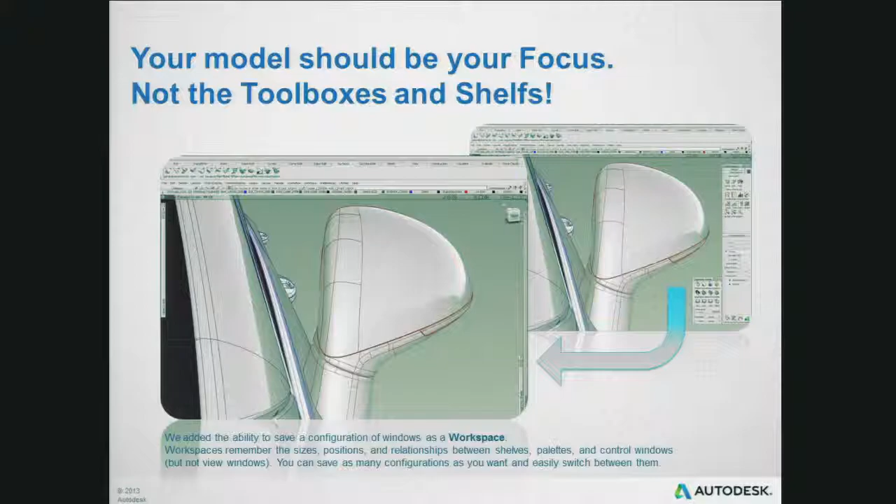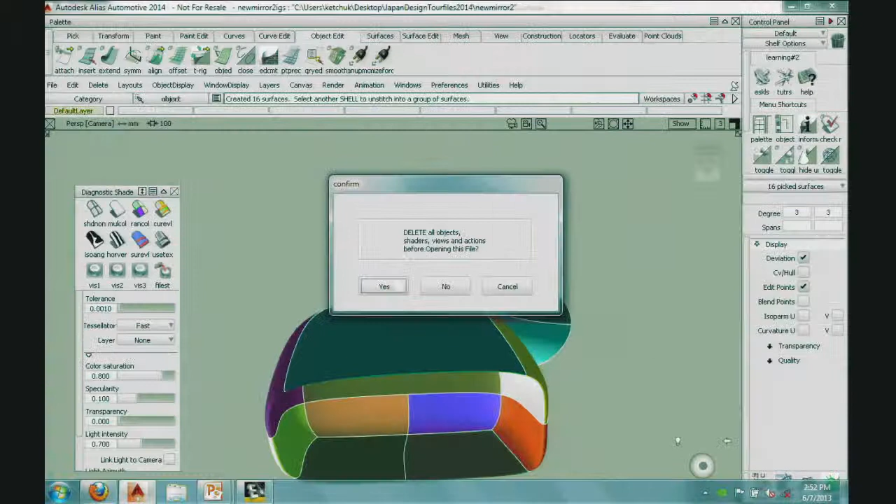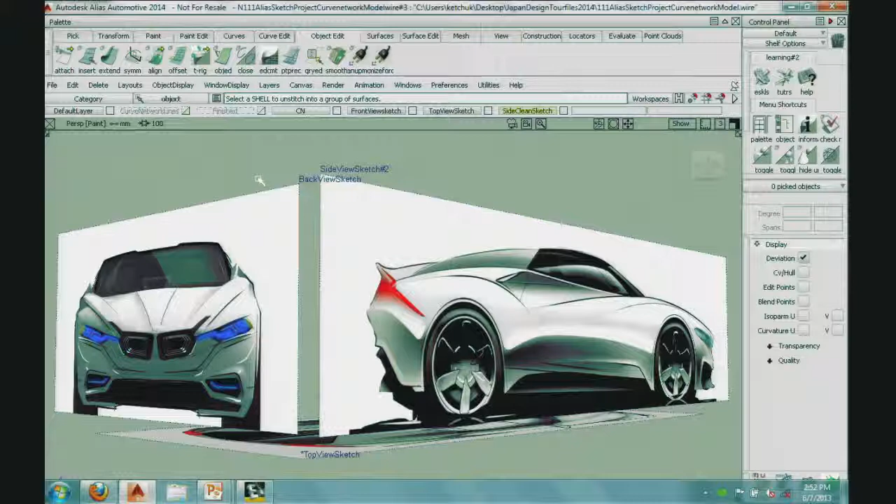So usually when you're starting out with a design, you've received some sketches or you've created some sketches that you want to start out with, and then usually you'll have a side view sketch as well, another view, and then of course create a top view of your model. Let me turn on the hardware shading real quick.

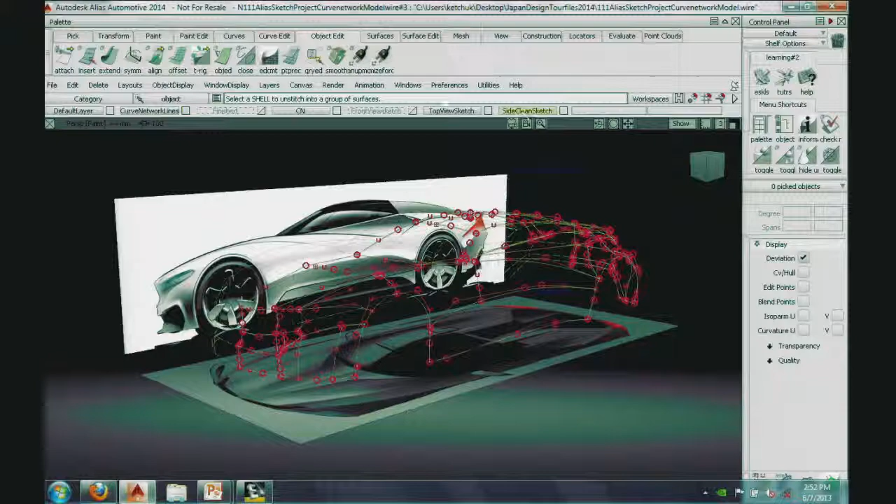I'll say shade on. Once you've got your sketches brought into Alias, which is pretty easy to do, I'm going to create some curves here. These curves are basically my... let's turn off the top view sketch. So my curves are just a quick way to construct an idea of what the sketch might look like. The curve network tool allows you, with a little bit of history and very simple curve geometry, to create some forms really quick.

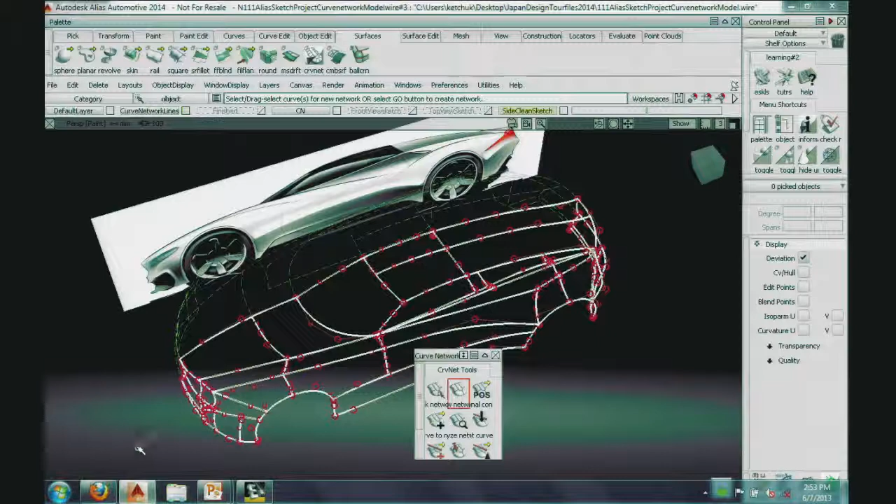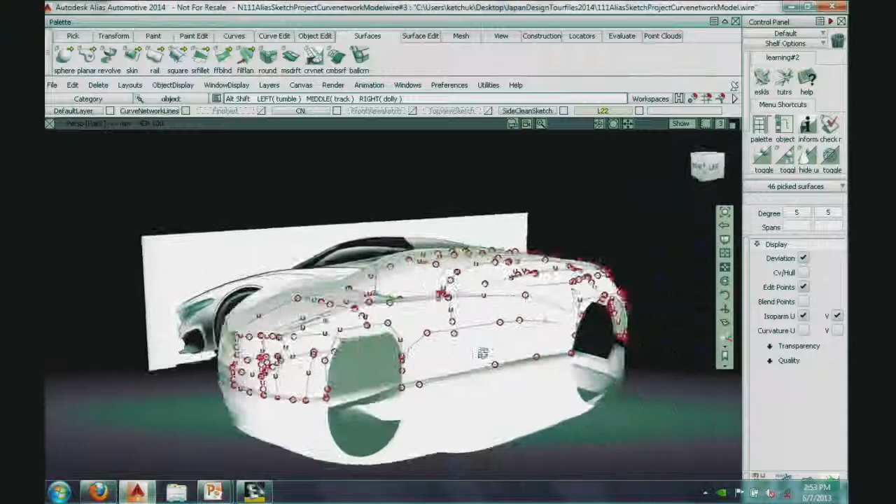So now I've got a form that I can start to look at and sketch over. I'll turn off my curve network right now and also turn off the isoparms. I think the real strength is that all this has history attached to my curves, so if I move any of those curves, all the surfaces are going to update in real time.

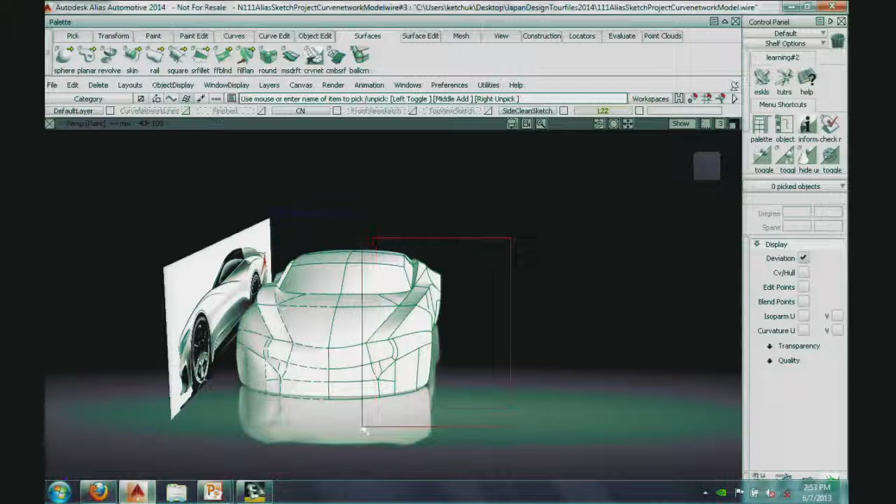Now I'm going to project that sketch onto the body, but I think I'll drop out the front because I have a different sketch for the front area. Maybe turn off the front glass and the roof as well. Maybe drop off a couple of these other shapes here. I'll just toggle that one off. So I've got the surfaces active. Maybe drop this as well.

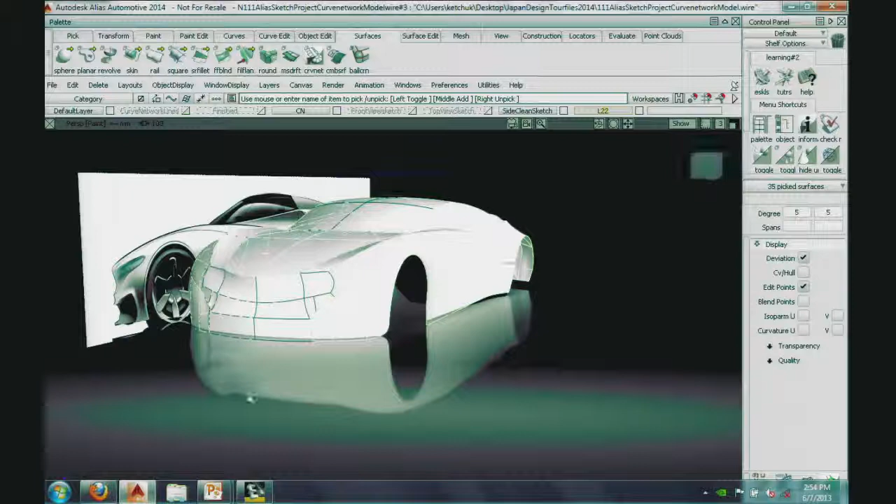Let's go ahead and use canvas and say project sketch. So I have the canvas selected and the surfaces from the curve network active, just those two active, active geometry, active canvas, and say go.

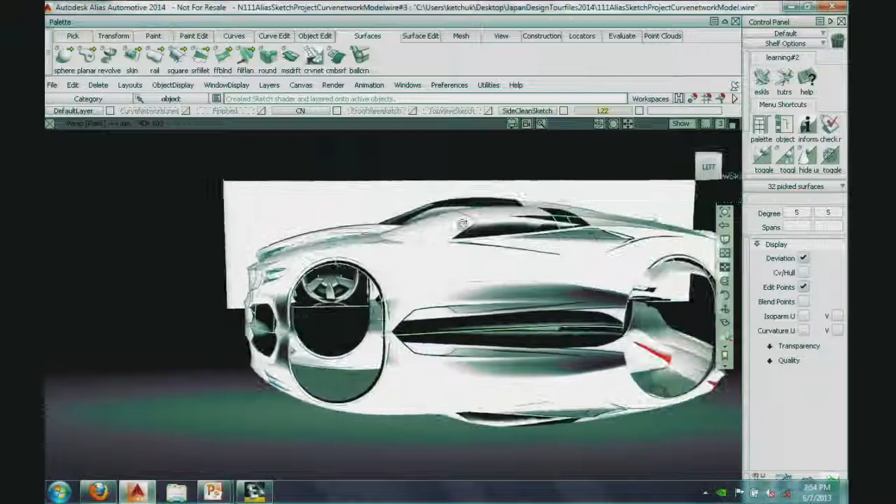So now I've got a fast idea what this curves and graphics look like on this form before I start to invest. Maybe I can do another projection or sketch projection onto the model, or even take my sketch and move it a little bit and adjust it so it looks good.

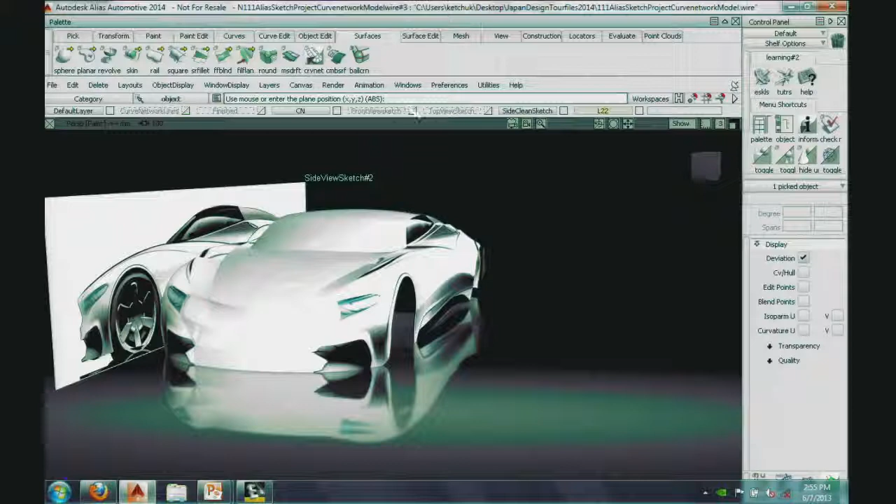Now I have one more sketch that I want to project on the front. So let's go to the front view sketch. Maybe turn off my side sketch now. I'll toggle on the front surfaces that I didn't project onto. So let's pick these surfaces here up front that I want to use, and maybe grab that and that. Maybe let's add these two. And again, grab the canvas.

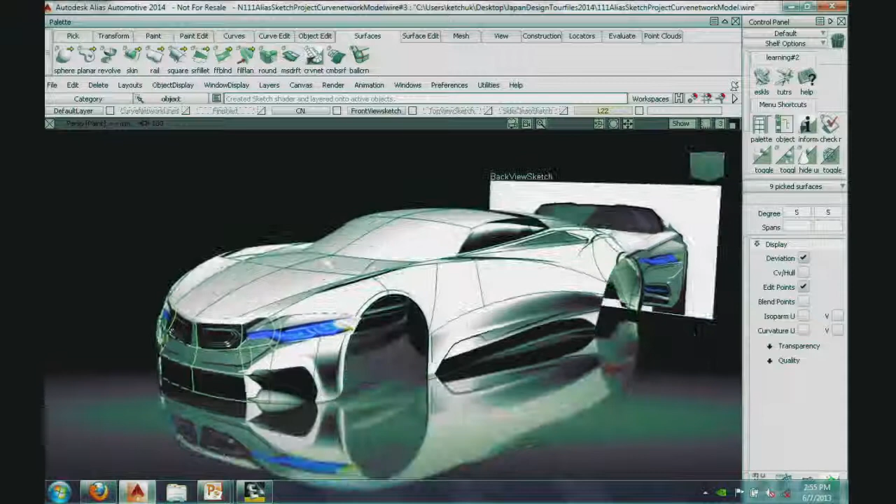So now I've got another canvas, and I can keep doing that over and over. But I've got a little video here that kind of highlights that workflow. Once you've gotten your curve network created, you can also—Alias is the only one that does this—sketch project. It's pretty powerful.

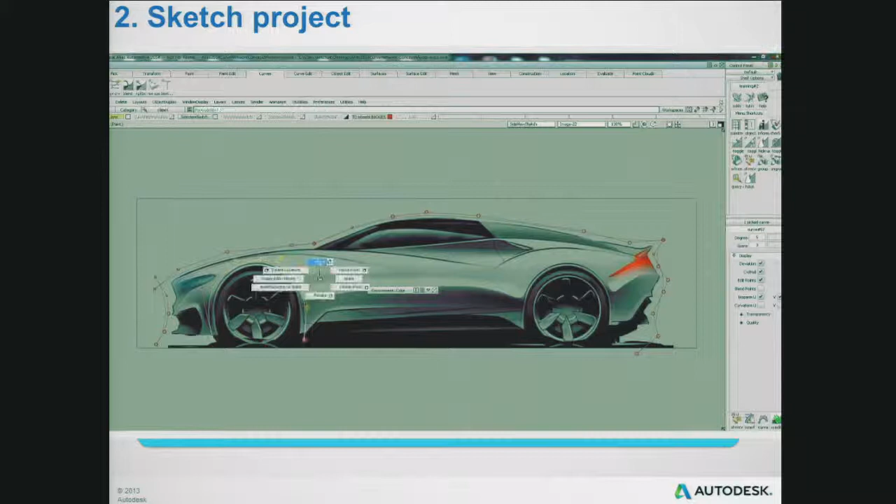Let's just look at this real quick. So take your curve network model, and then take curves and attach it to your sketch. You can't do this in Photoshop. You can't do this in any other application. Be able to stretch and modify the 2D sketch, and then the sketch is projected onto my sketch model, and I can play with the forms.

I can see that my sketch is kind of underneath the form, so I need to pull it up a little bit. I'm warping and stretching the sketch, and then projecting it onto the simple model.

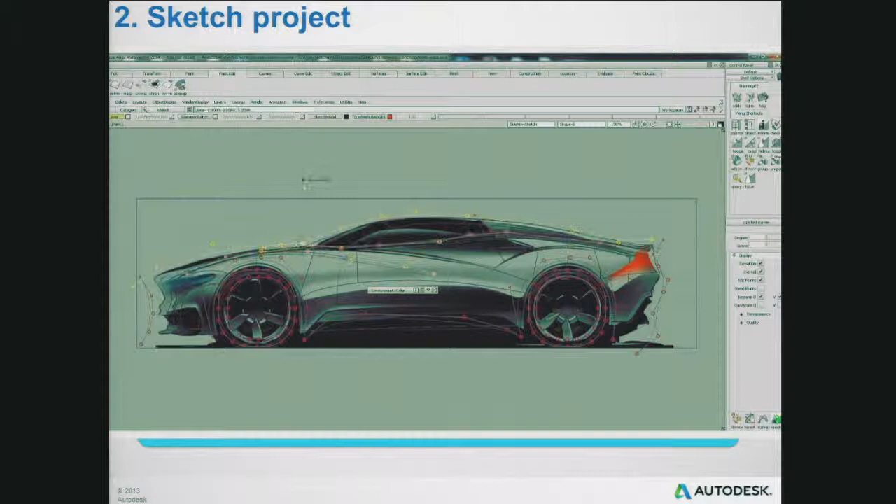So overlay canvas with symmetry sketching, the awesome sketching brushes that are inside of Alias, and using that now to project another version.

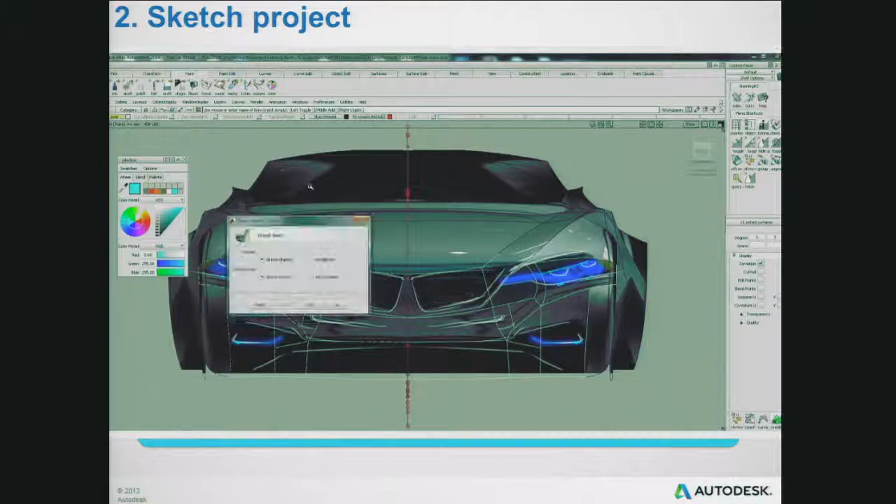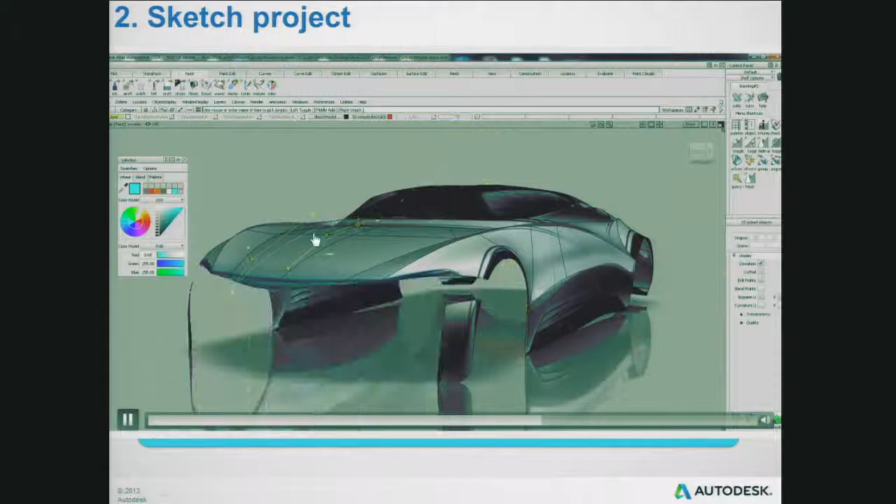And then I recognized at the beginning there, let me scooch back just a little bit right here. Right at the beginning, right here, I pulled up some of my curves because we had shock towers that the hood was kind of poking through. So I moved that curve up a little bit to allow for the change in the package, and then redid another sketch project to see how that looks.

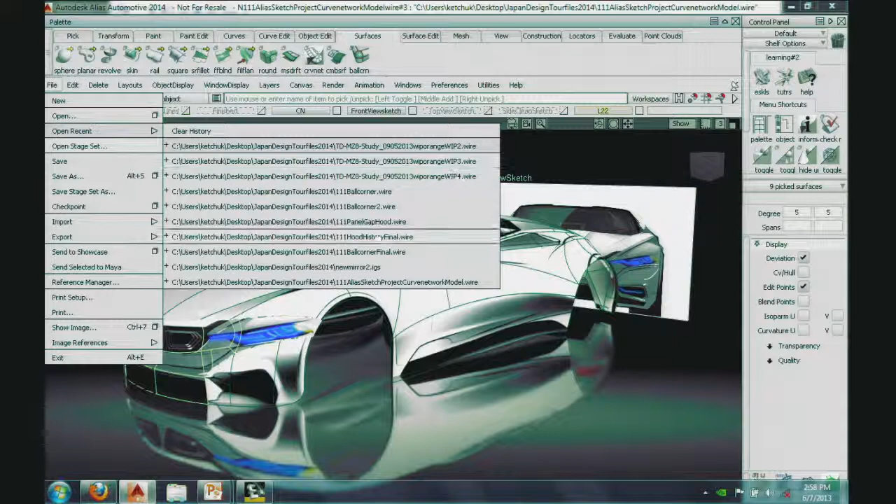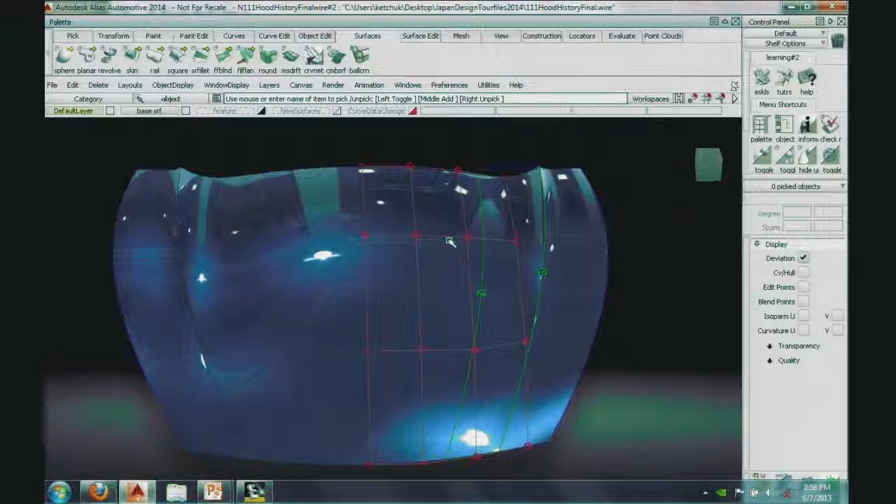So here's a hood model that is very simple, but I think it tells a very powerful story. I've got a hood here, and Alias, of course, uses HDR images for your lighting in your environment. So you've got real-time lighting coming from an HDR image. But I want to show you how fast the history updates. Let's go ahead and modify this form right here. So I'll grab my little hot box. If you haven't seen this, this is under CV Transform.

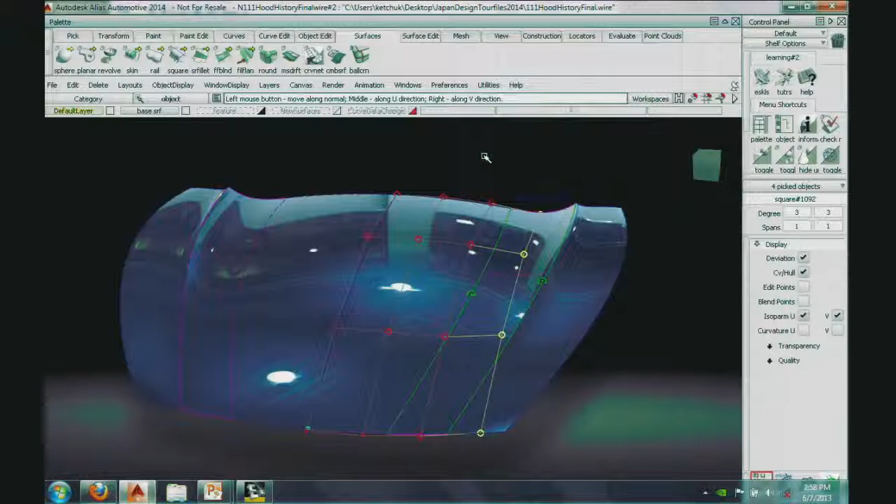So I'm just going to modify this, push this up a little bit because we were told that the shock towers were poking through the hood. And a designer can quickly come in here and make that change. And maybe he wants to pull this edge down or maybe push both of these up here. I'll push these up together. And notice that my fillets are all updating, G2, G3 continuity, all updating in real time.

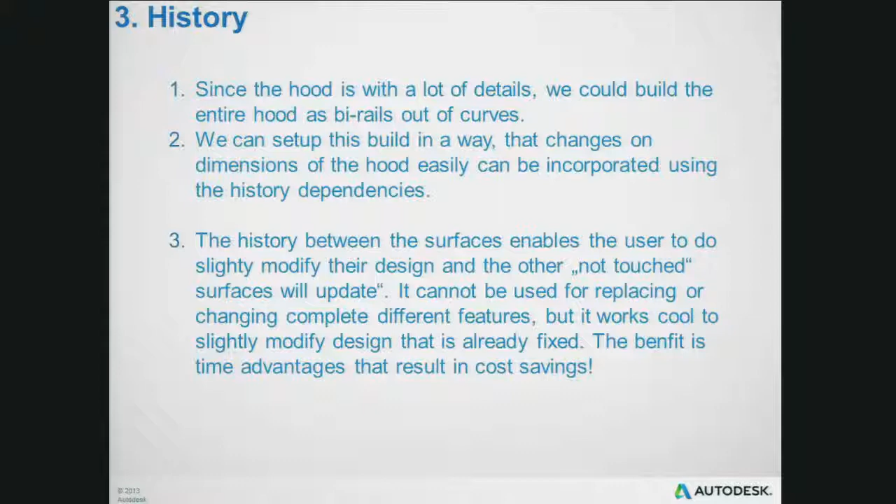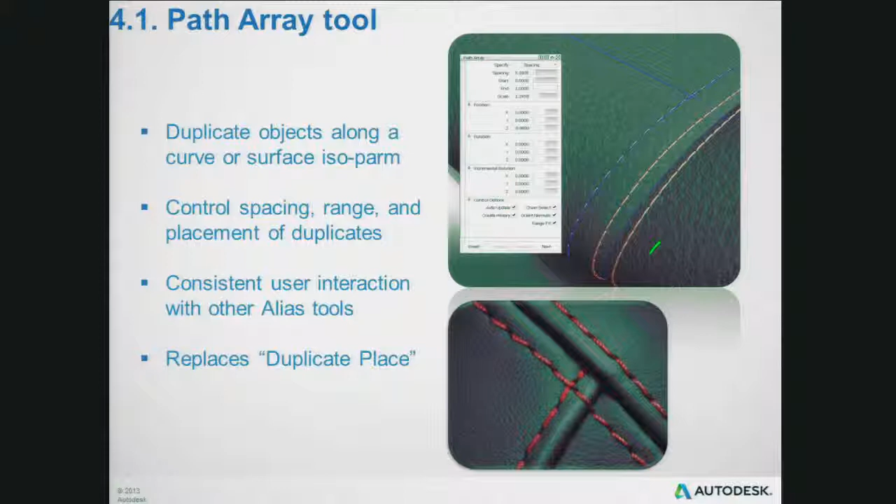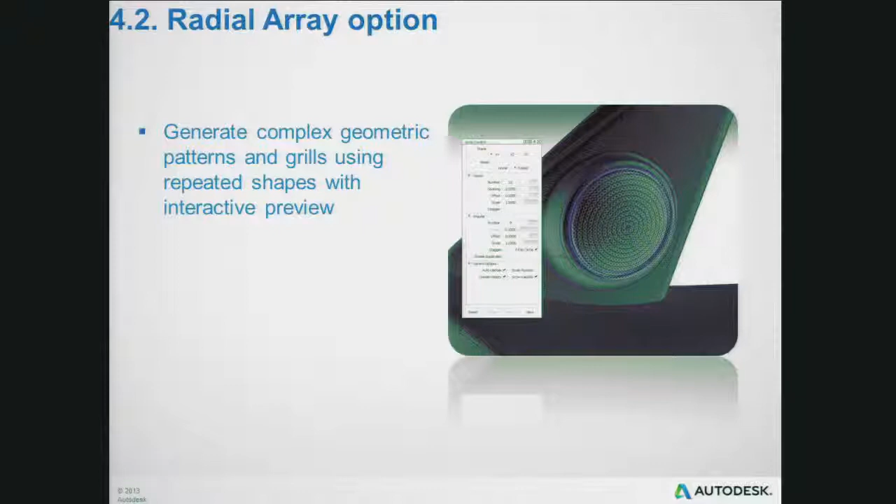And ball corners, as I mentioned a little bit earlier, they're very time consuming. In any other application, the ball corner tool, the geometry that's created has to be destroyed in order for it to be a Class A model. This geometry that you see in typical ball corners in other applications just is not a good geometry. It's not the right structure for Class A. And each ball corner takes 7.5 minutes for someone to create.

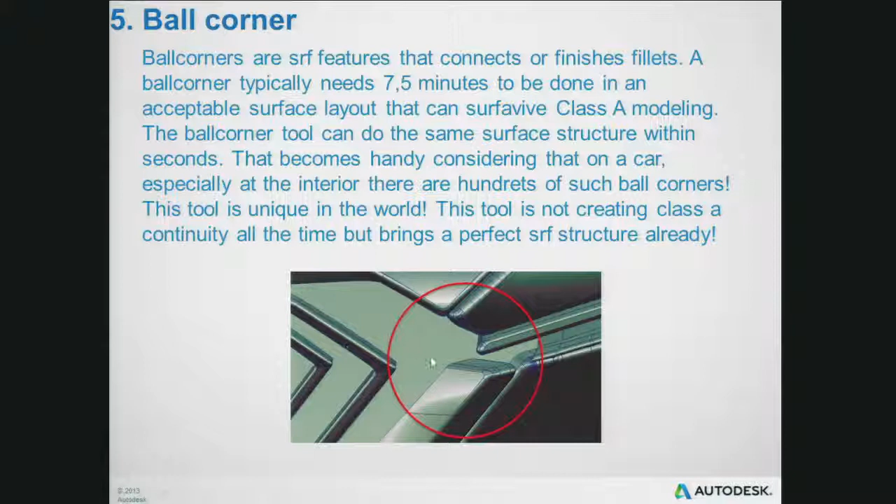And if you consider how many of those ball corners are on an exterior and then multiply that by about 30 for an interior, you can see where a lot of time and effort goes. Let me show you the ball corner inside of Alias.

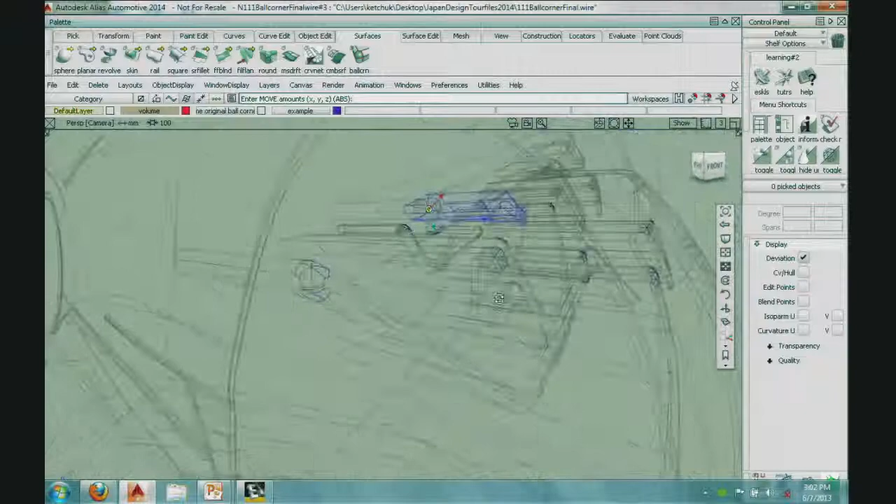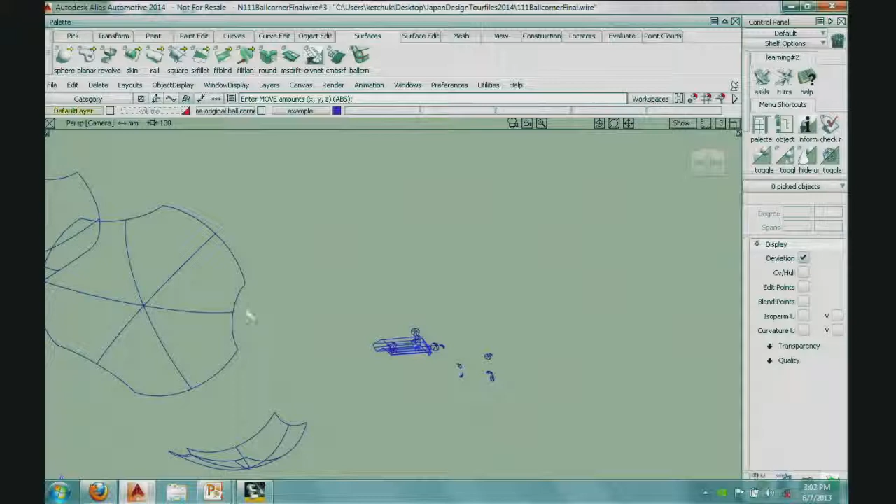So here we have a front end of a concept car, and you can see, if I toggle off the model real quick, all these ball corners that are everywhere, and that's just on one half of the vehicle and a very small portion of the car. And this structure is not a good structure for Class A, no G2, no G3 structure. You'd have to start over. When I was talking about ball corners earlier, I felt like the ball corners were kind of like stars. There's so many, and you think 5 to 7 minutes, 5 to 7 minutes, 5 to 7 minutes. It'll take away your whole day. So let me just show you the ball corner tool inside of Alias here.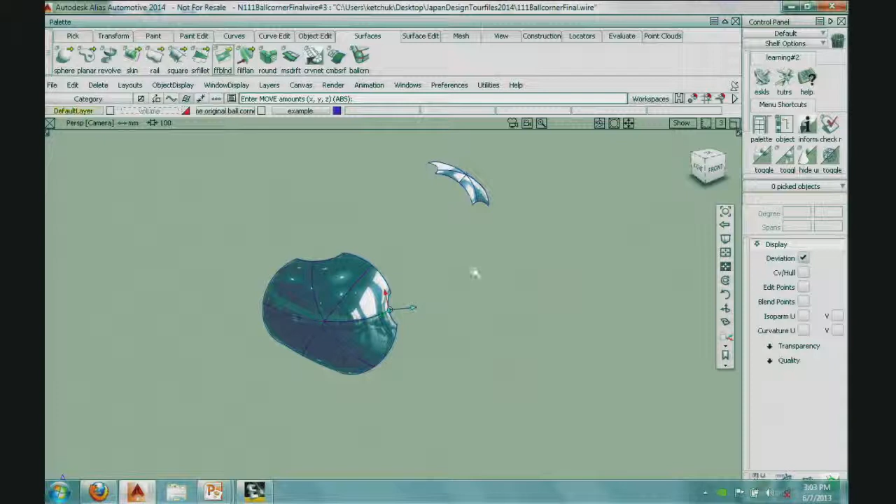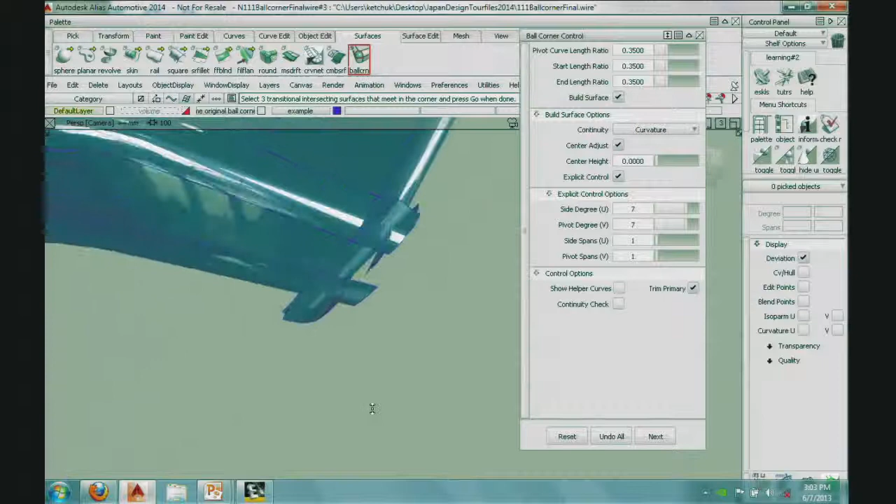So this is a round, not a ball corner. And this structure cannot go to Class A. Let's show you how the ball corner works. Let's go and select under Surfaces, Ball Corner. And so what's the power of the ball corner? It saves you so much time, and the structure is ready for downstream Class A. So I've got 3 surfaces here, 1, 2, 3. So here's how this works. You just select those 3 ball fillets, space bar, select the face, and there is your ball corner. Next, excuse me, let's not move the mouse around here.

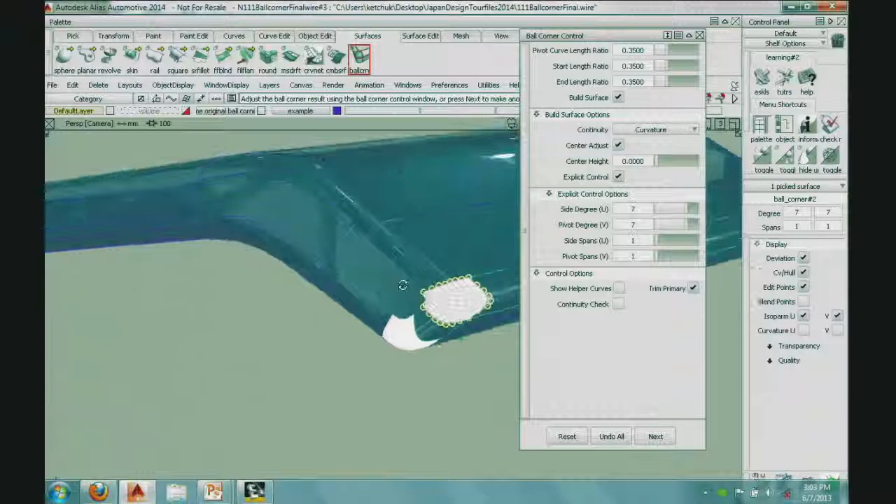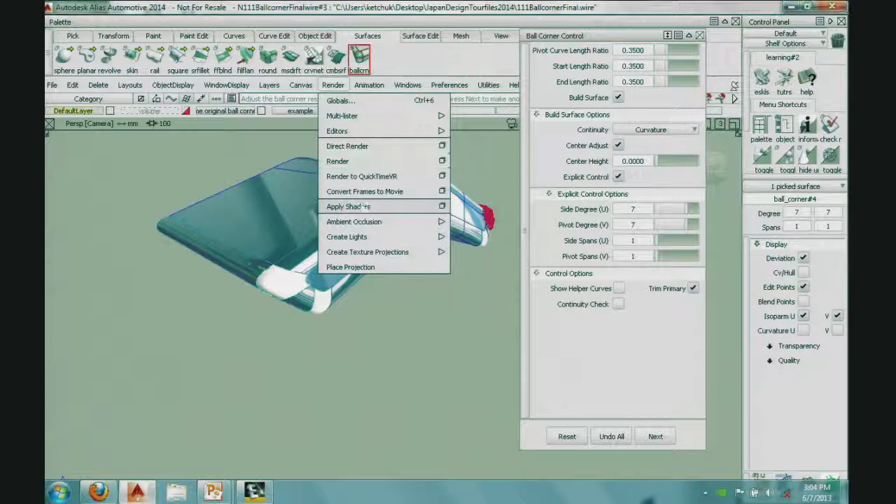Again, just picking a face, and we have that all has explicit control with curvature, explicit control, and we can lighten that up or increase the geometry as needed to sculpt the forms. So again, just select these, and to do this typically in another package, it's very involved. So just that fast, we were able to create really nice ball corners.

So let's select this material here.

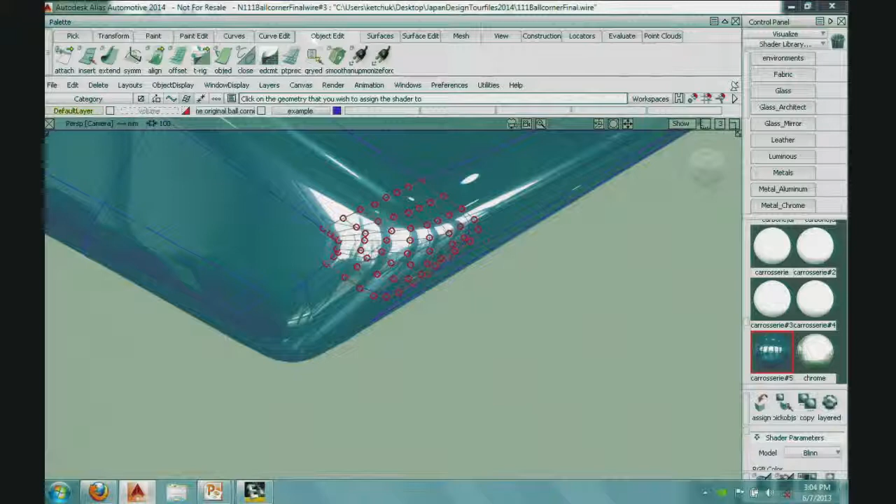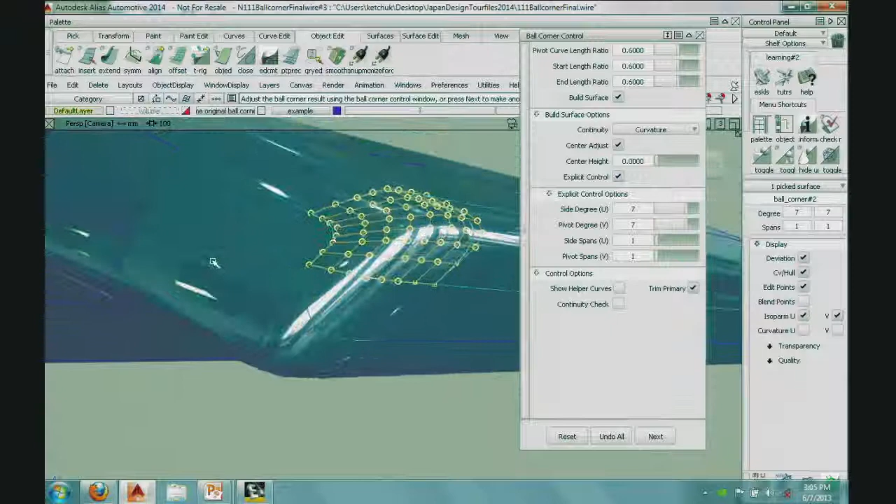So we can also play with basically the shape of the ball corner, again with the history. If you don't like how the highlights are going, you can widen those open. Again, keeping those shapes to be more sympathetic here. So again, all with history, all with good structure to go to Class A. Time saver, big time saver.

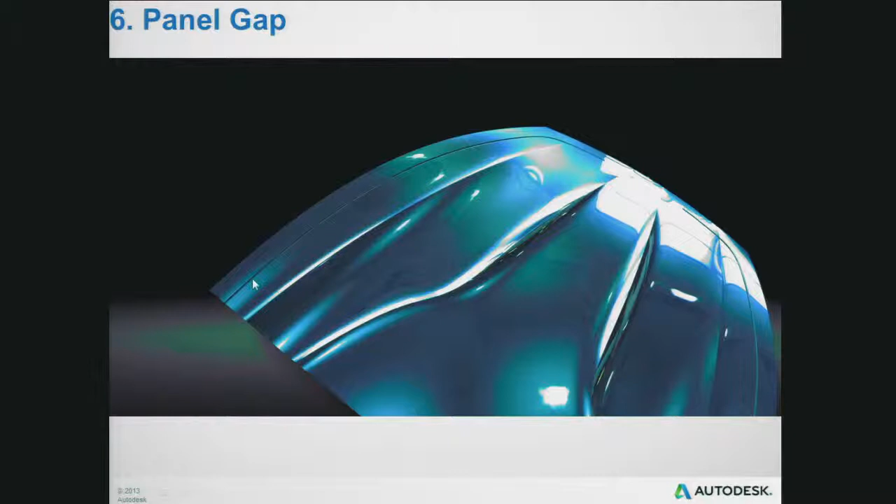All right. So we talked about ball corner, and you can see the speed that you can save there. In panel gap, we're still talking about concept modeling, and I find that the concept model really suffers from not having shut lines and shut faces. And just looking at this kind of design here real quick, we can see that from this panel gap to this feature, there's different distances and negative space and how these shapes talk to one another.

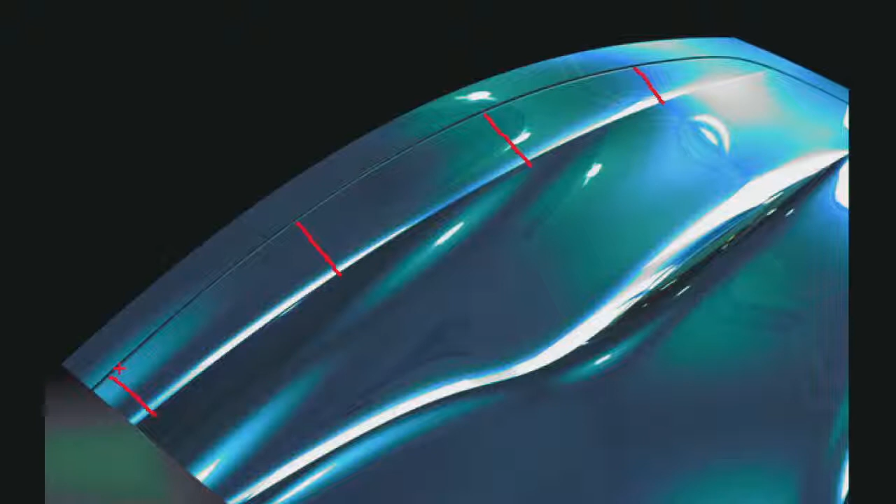If this panel gap was not there, and you made a design decision, and then engineering gives you where your panel gaps need to go or proposed, you probably would maybe redo this line so you have a little better relationship there. So we find that panel gap is very important for even concept model stages.

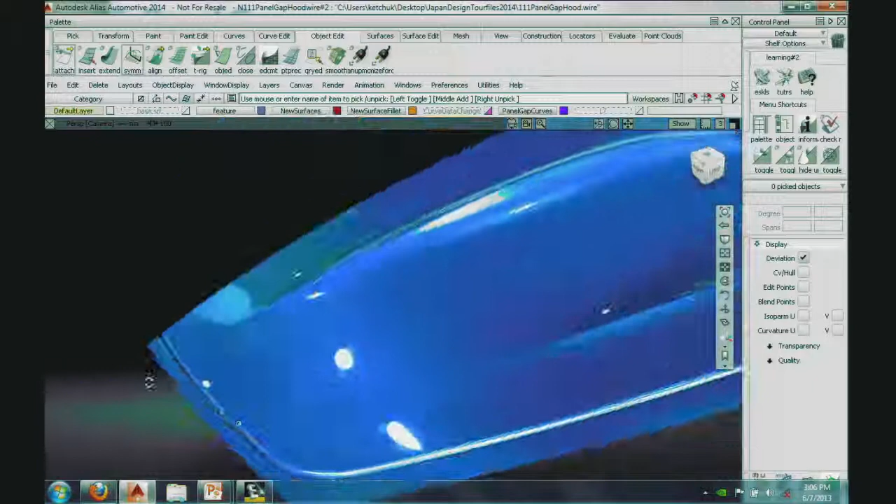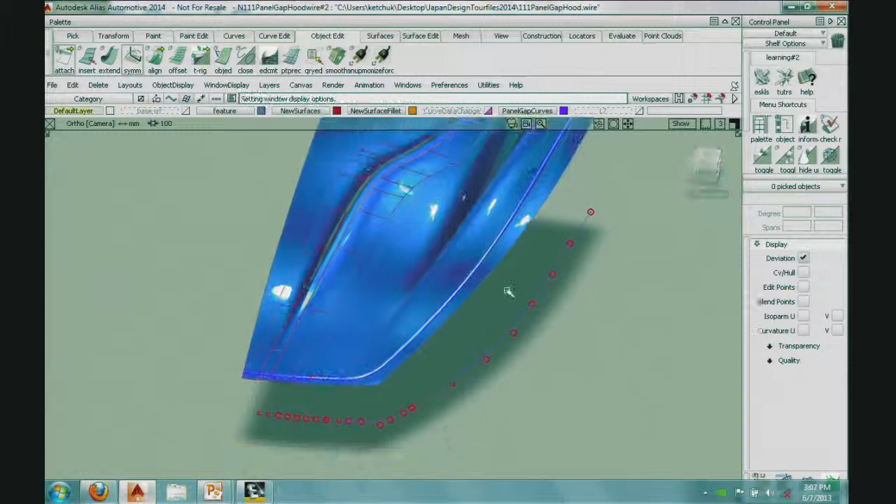So we have here a hood that's been created, and that's a giant gap, by the way. Let's fix that. So we see this form kind of coming around here, and I think that this looks a little bit too round or too full in here. And once we put the panel gap into the equation, let's toggle off that background. Okay, and let's also turn on our model. So we see that we have this set of curves here that we have projected down in a top view and are manipulating, and it all has history.

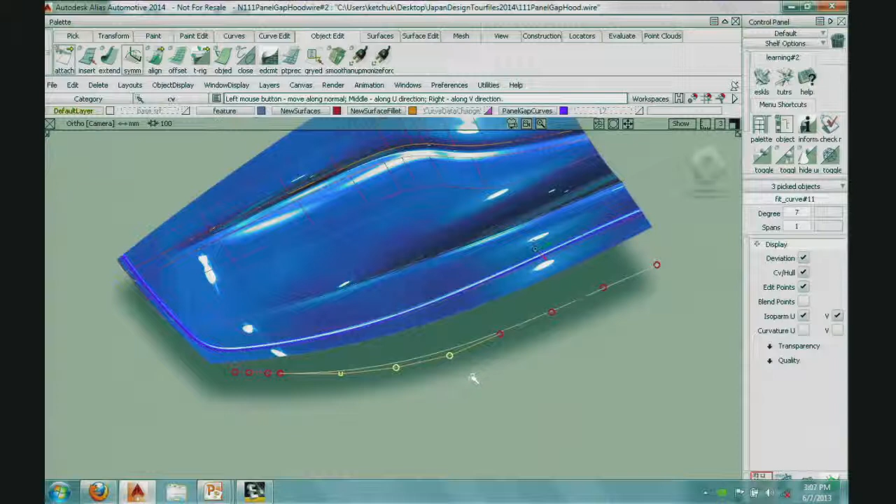So if I want to modify this and maybe flatten it out, put a little more tension in the line, I can do that. So I'll just pick my CVs here. Let's grab these guys and maybe add that one and do a CV transform here. Panel gap all has history, right? So I can go ahead and say, let's just move you in a true Z location. So let's move this over a little bit.

And we're going to, I'll have a different file. All right, well, let's just do it in real time then. Let's pick all these, let's pick this curve on surface here. Pick curve on surface.

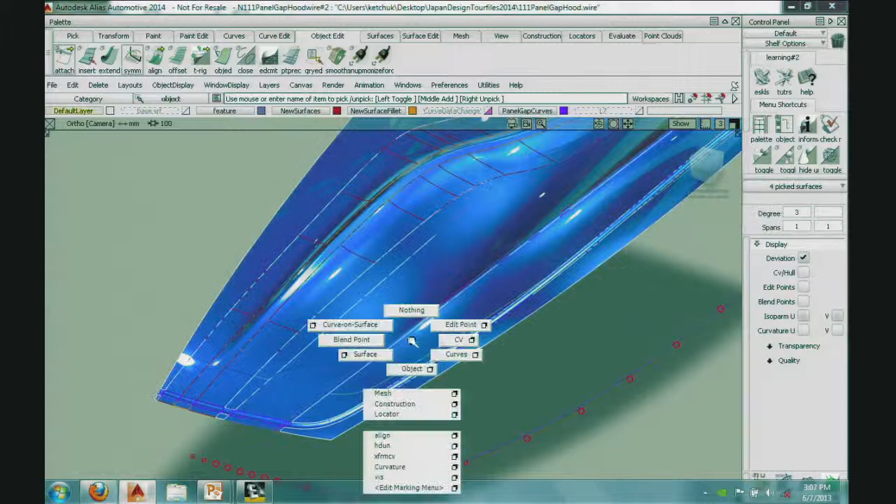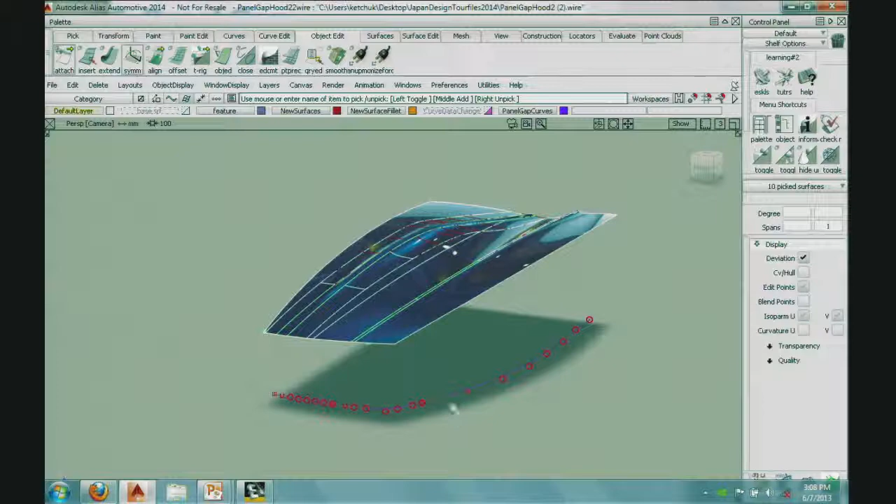All right, so I've got the hood. I've got this curve right here. Let's go ahead and project it. So of course you can do projecting in the Z-axis. So let's just go ahead and select that. And you notice that it gives us a curve on surface right away.

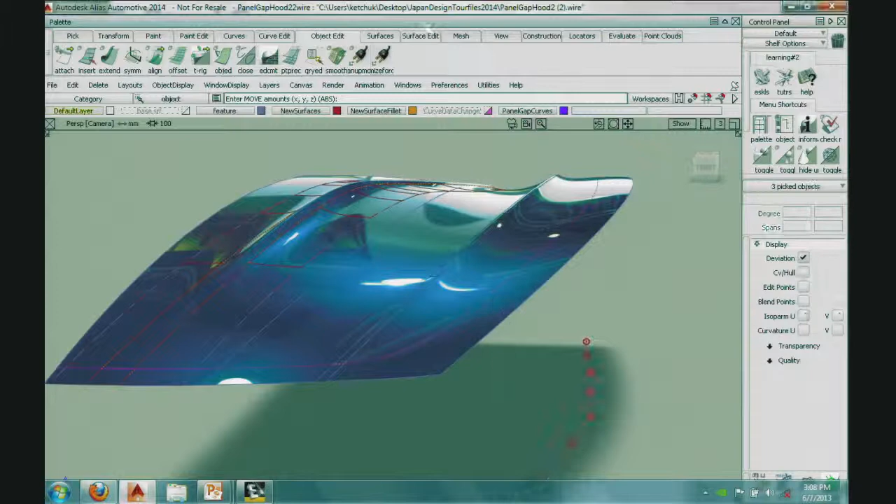And of course, if we want to move that line, we can explore that a little bit and move it forward a little bit. Maybe move these CVs in. But now let's just use the panel gap tool. So the panel gap tool is under surfaces and panel gap right here.

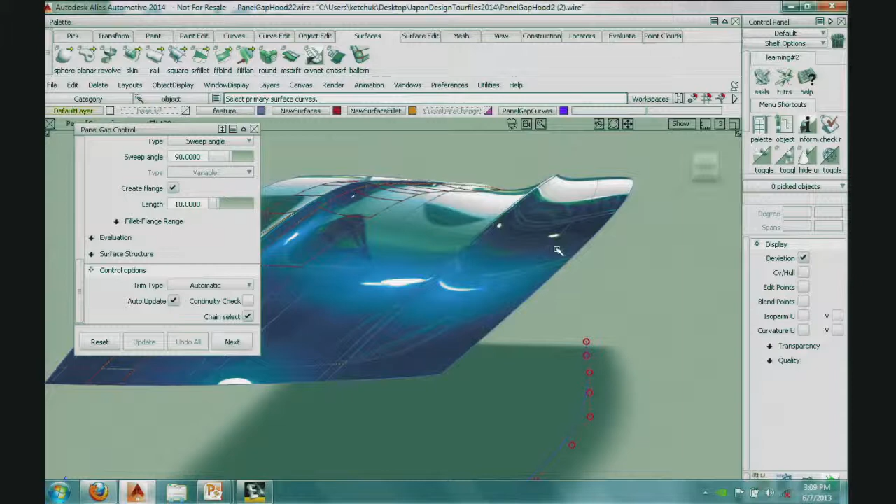I'll make these numbers a little smaller and also check our curvature here, all with history. And so let's go ahead and also turn on chain select. Automatic update. So I'll just double click on that curve on surface and maybe add this other curve on surface over here. And it found all the curves on surface, even though those were separate surfaces. And I'll say, OK, OK, and build.

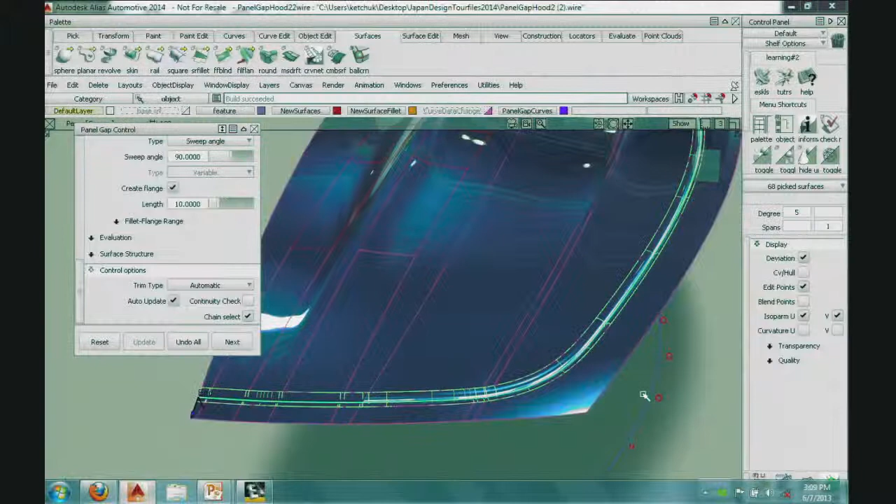So all the surfaces will have history-based radiuses, flanges, all in real time. And if I move the curves that are being projected, all those panel gaps will update. So let's go ahead and now pick the curves here. And maybe we just move those forward a little bit. Or, okay, yeah, let's just move this whole thing forward. I'm going to pick this curve here. Move this forward just a little bit.

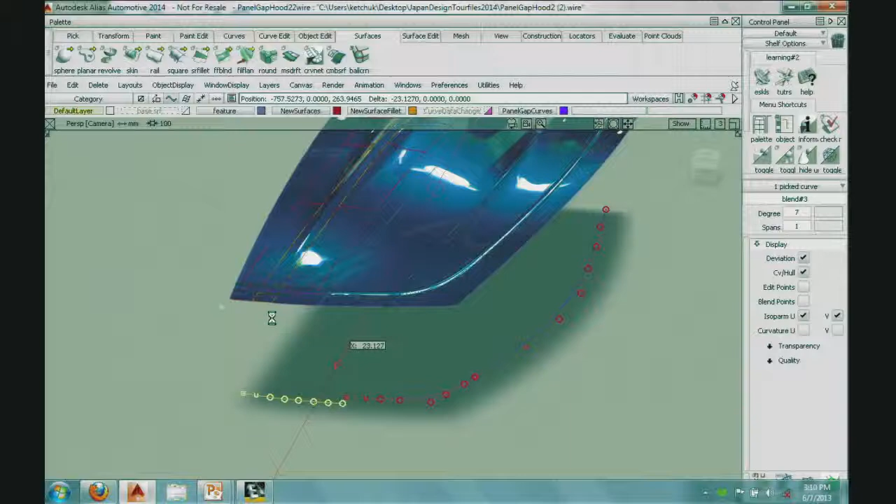This curve has history, which is aligned to this, which then is projected down, and all the panels are going to update. So I move that forward a little bit, all that's going to update in real time. So history, panel gap, and allows you to make good decisions on concept models.

That is ugly. All right. Too far, but you get the idea that you can adjust your panel gap in real time and see your shapes with all the details and shut faces.

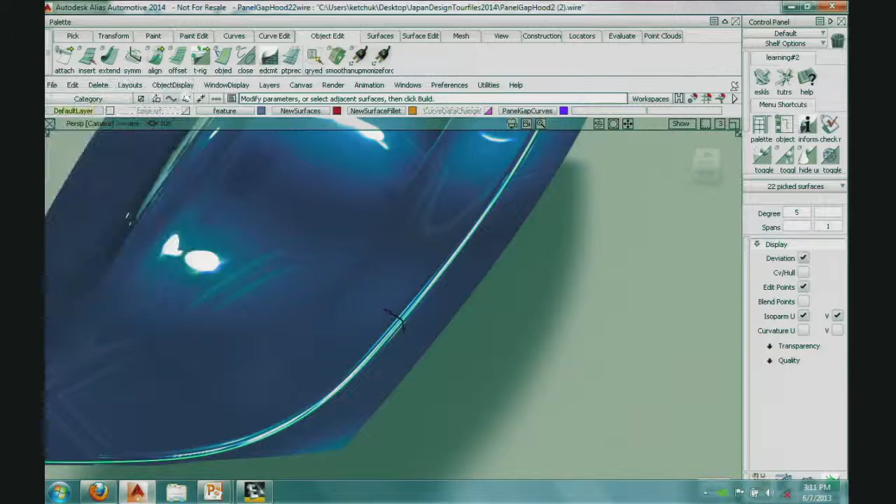And there you go. All right. So we're going to switch over to Class A right now. And there's going to be three items that I'll show you and just kind of talk about. You'll see it in detail here in just a minute. But there's three tools that we introduced to 2014.

Volkswagen, BMW, General Motors, a lot of our automotive customers were saying, without a barrel or helix tool, we can't consider Alias as a tool set that will allow us to deliver feasibility in a manufacturing workspace. So we had to have these tools, and you're seeing them now in 2014, and you'll see a live demo of that here in just a minute.

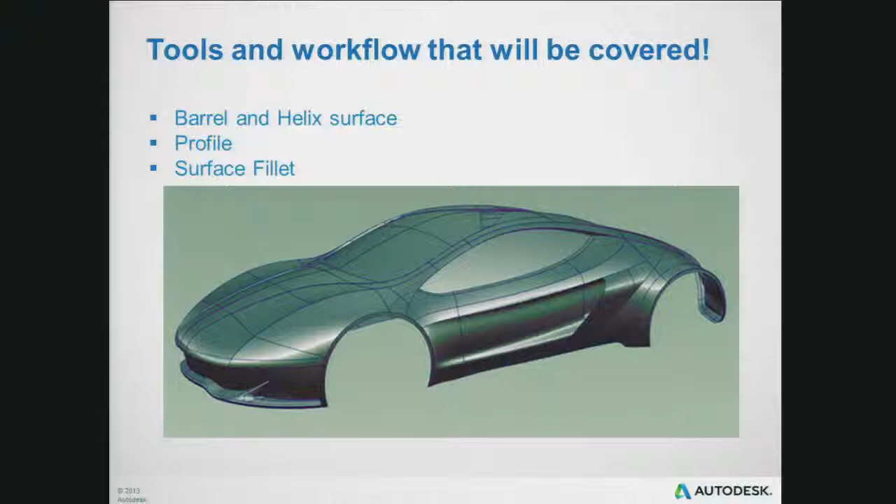This is just a quick idea of what a barrel and helix will provide, but just know that very fast, history-based, and will ensure manufacturing feasibility.

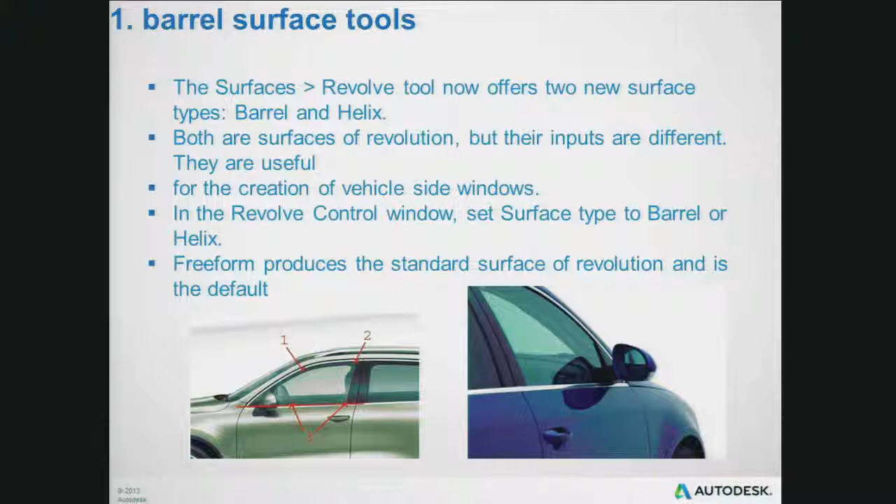That's what it's going to look like. Okay. So profile tools, the second one. We recognize that also another hard requirement for at least for Volkswagen and many others, that to be able to create complex seals and rubber moldings that we couldn't do it with rail and bi-rail and square.

We had to have this other tool that allowed you to take a complex section and run it down a very complex curved path. And you'll see that live here in just a minute, but profile tool now will allow you to create very complex sections, add those sections and modify them, and you'll see that presented live as well.

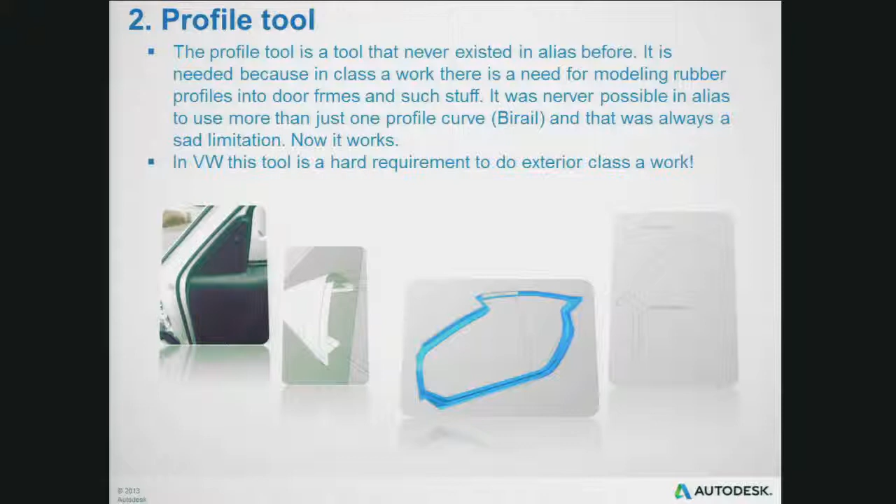Also, brand new in 2014, we introduced something called form factor. What form factor means is that if you have two surfaces and they start to open up like this, our old tool, our comb plot wouldn't be consistent. You'd get an inconsistent comb plot that the fillet would change in its shape.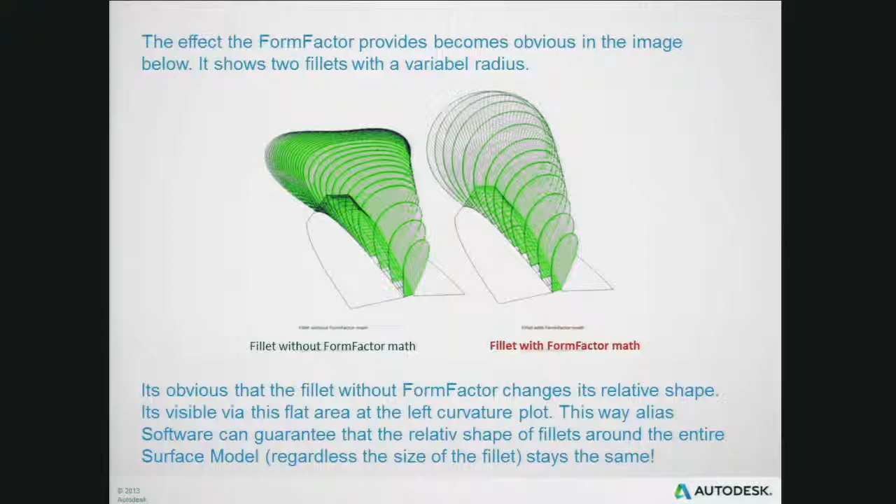And then the last one is a surface fillet. We wanted to let you know that you can basically query edit your fillet that you've already created and add another shape, and the surface fillet tool will allow you to add the other form by just doing a shift key. So let's play that video.

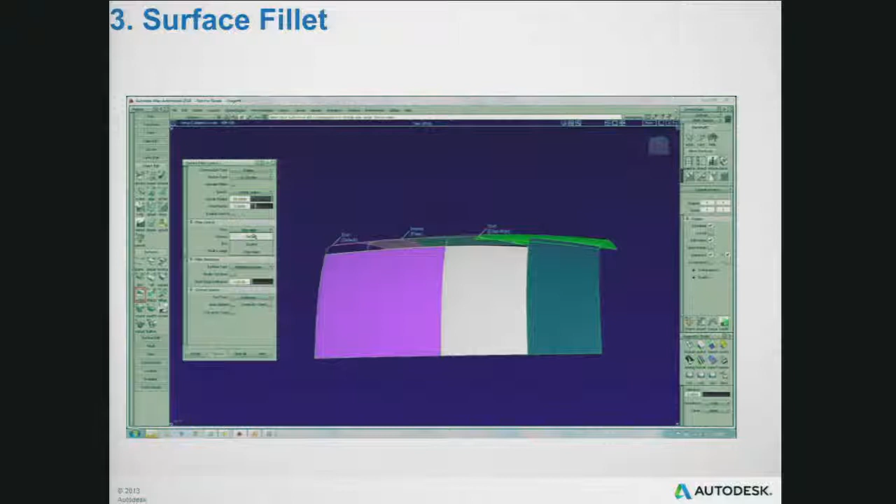And then the last message, and you'll see a little more of this, but basically in 2014 we've now given you the ability to reuse the time that you've already spent in Alias and send it to other applications. So Illustrator, now you can read in vector curves right from Illustrator. Go to perspective view and say, okay, I like this, and send it right to Illustrator, vector lines.

Also send to Maya, send to Showcase, and then within the very near future, you'll be able to send one click right to VRED.